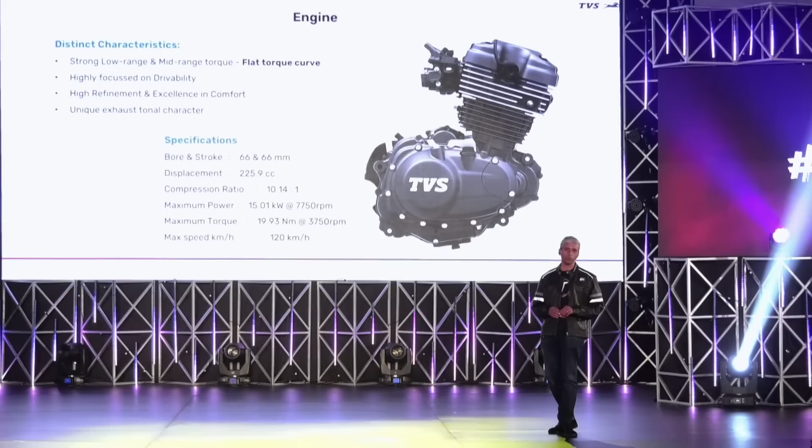The engine is a 66 by 66 square engine, 225.9cc. Power, torque - but what matters is the distinctness, the distinct characteristics: a very strong low and mid-range torque, a unique flat torque curve as flat as it can get, and highly focused engineering that has gone into looking at the drivability.

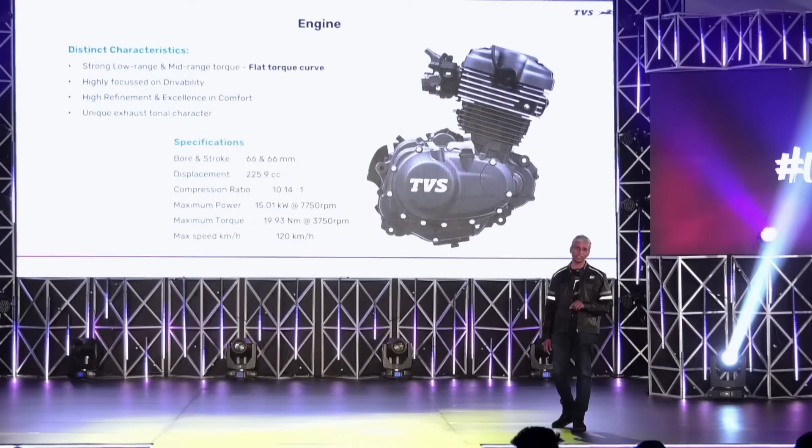We have driven every mile, every kilometer of the initial stages, looking for the distinct characteristics. That has been the theme of the engineering. And it's also highly refined, with excellence in comfort.

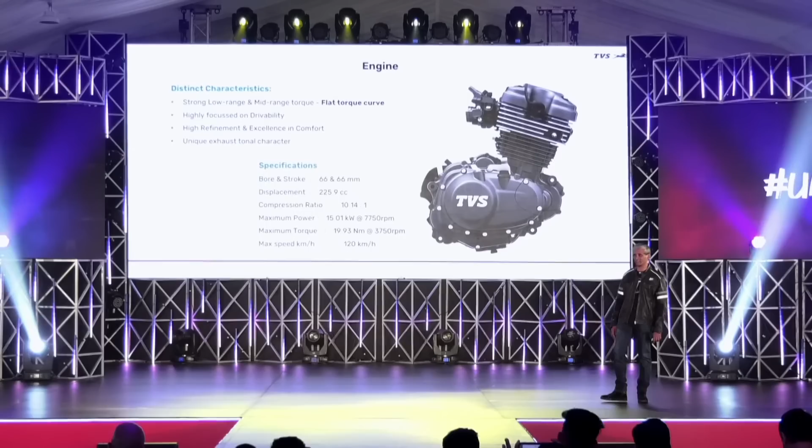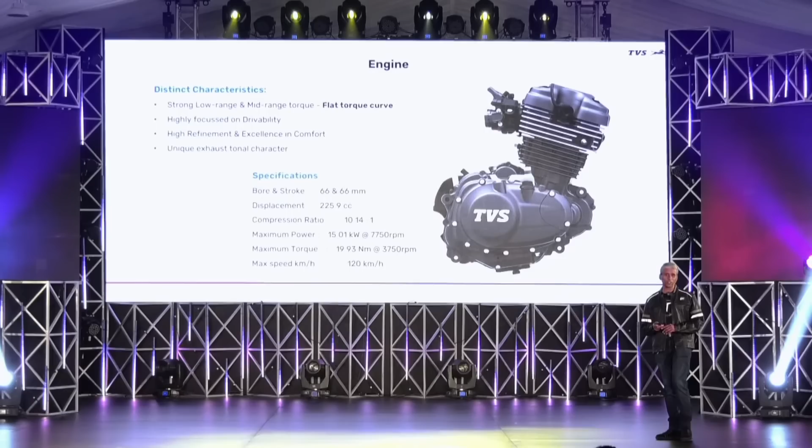On the engine, there's a lot you can do to make the ride more enjoyable - not only delivering the power and torque, but also the character of the engine. It can offer a lot of comfort when you want to go for a long ride, and to top it up, the unique tonal character from the exhaust adds to the characteristic Ronin engine. Let's look at some of the details.

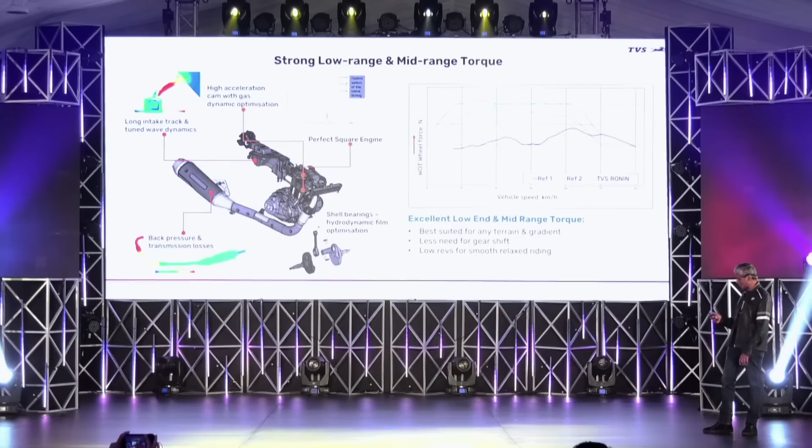The curve you can see here offers so much low and mid-range torque that keeps you going, and that comes out of detailed engineering of a lot of bits. What you can see here is 3-4 pieces out of that.

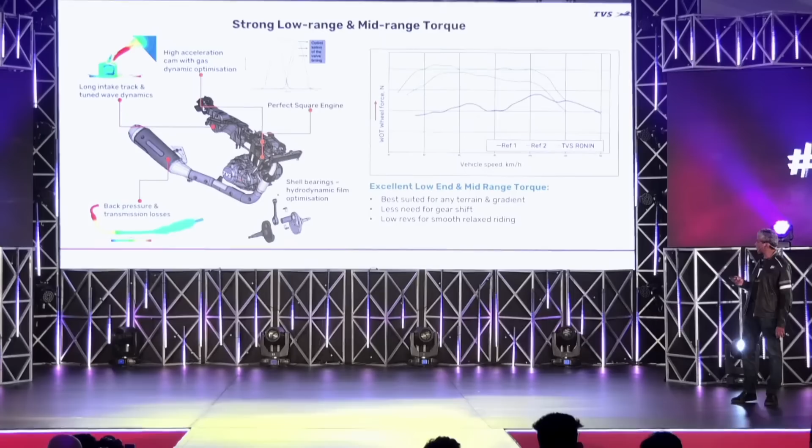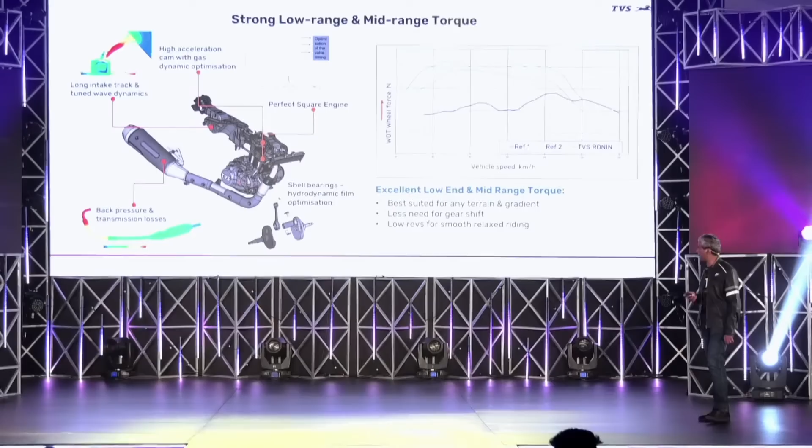The wave dynamics on the intake track, typically a long track can give us high torque, but the dynamics matters a lot. The dynamics matching with the intake and exhaust, supported by a high acceleration cam, adds up to the dynamic optimization of the fuel flow, the airflow, and the combustion that happens inside.

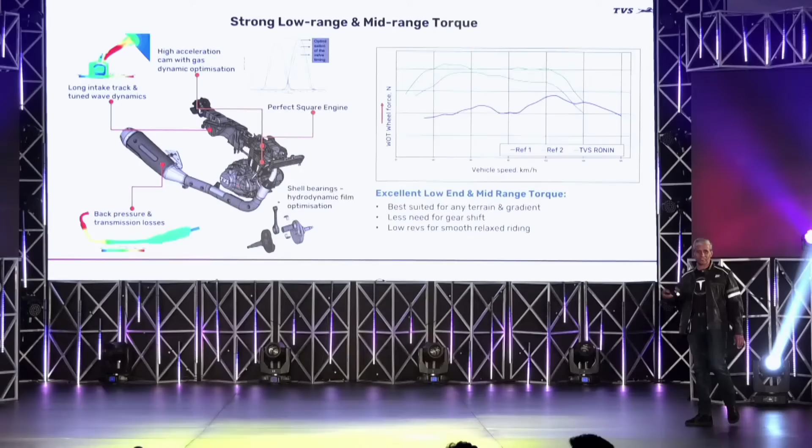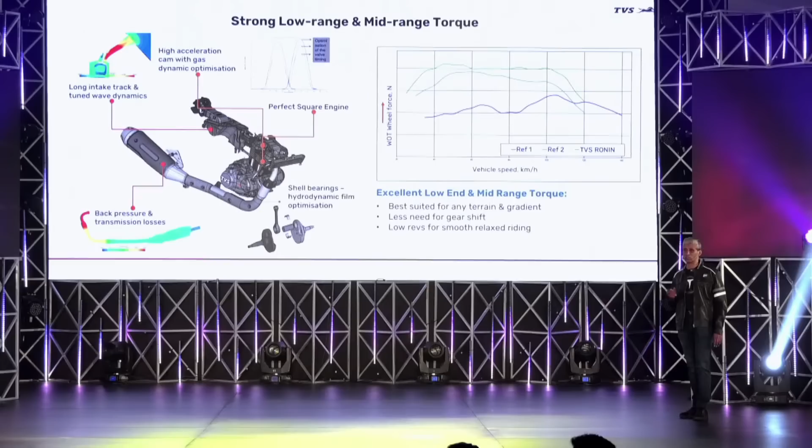To get all of that throughout the wide range, particularly in the lower end, shell bearings are used with hydrodynamic film for lubrication, which makes the crankshaft drive so free, so ready at low speeds to deliver friction-free torque output. That's what matters to the rider.

It's best suited for any terrain, also on the gradients. Let's take a look at the gradients a little later. There will be less need to gear shift, so we keep going, and low revs add up to a smooth and pleasurous ride.

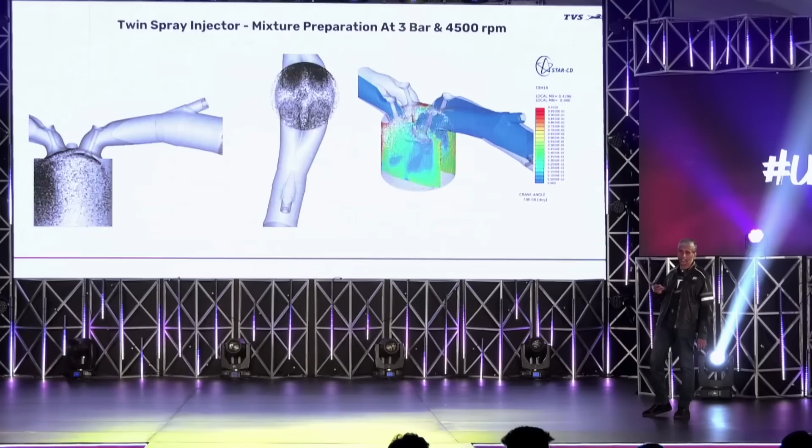One of the fine details in getting the combustion right is how you target the fuel spray. The fuel injection is something that will look the same on the outside, but the details matter a lot. The twin valve intake, the way the port design is done, a lot of simulation is done to get the characteristic fuel flow inside, the way the atomization happens, and the swirl and tumble, the way they complement each other, is all done to get that unique characteristic torque and power delivery, and making the combustion very smooth. The result, it's unscripted.

There is no reason to compare or talk of scoring anything or winning a race. But then as a biker, I would like to know what I get from the Ronin. So we just looked at certain typical day-to-day demands when I am on a bike, be it a 0 to 60, be it a pass-by acceleration on a highway, I need to slow down and again pick it up in the 4th gear, in the 5th gear, be it 30 to 80 kph or 50 to 80 kph.

It just goes effortlessly, goes ahead. With the opening of the throttle, it just instantly responds.

Another important parameter which all of us as bikers know is when I get into traffic, I would like to be a bit lazy, I would like to shift gears less, I would like the bike to keep going. So one of the engineering targets is to get the 3rd gear, 4th gear, 5th gear speeds as low as possible so that there is less need for shifting, and with the throttle opened, it just responds and goes.

And biking is all about going on the weekends, going for long rides, and also on the mountains. So gradability on higher gear is also an additional target we took. We wanted to make sure that in 3rd gear, the Ronin will climb the fastest on a 10-degree gradient, not just a small gradient. These unique characteristics are also added with a unique signature, the Ronin sound character.

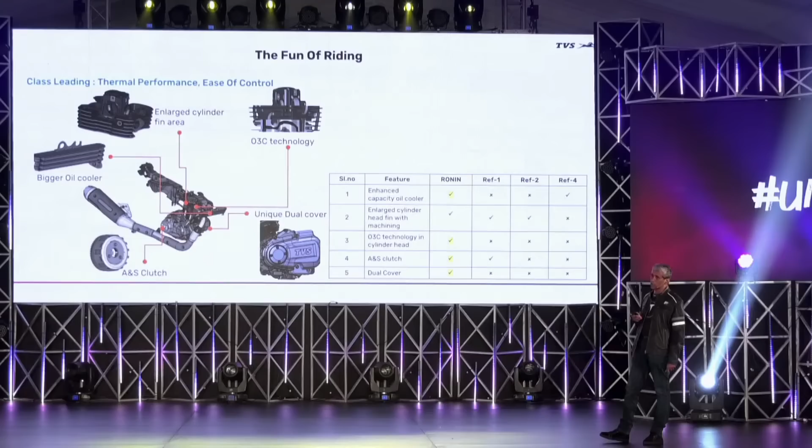The oil cooler is enhanced, O3C technology is put in, and the cover is a unique design that has gone into 2 layers that helps both for the thermal comfort and also for the sound characteristics that Ronin comes with. And the assist and slipper clutch adds to the joy of controlling as and when I need, whether it's a partial slip, whether it's a shift down, shift up, all of that.

So here again, a comparison to say things that are done new and different to get that unscripted characteristics. This engine has gone onto a vehicle that's also having unique design details, engineering, that makes it stand out of the crowd.

The theme has been a pleasure ride. A pleasure ride is one where I don't race with anyone. I'm not here to win a race. I'm not here to check my lap timing. I'm not going to be scoring any points, but I just want to ride. Ride wherever I want to, go wherever I want to. It's my ride, it's unscripted.

So what it means is planted, but also precise handling. Planted need not mean that I'm lazy, I don't respond. Control at ease - as I cruise through traffic, as I cruise through highways, any control that I would love, it is at ease. Comfortable upright posture for long rides, and a great ride comfort in all terrains. That's been the theme with which the whole vehicle engineering has been done.

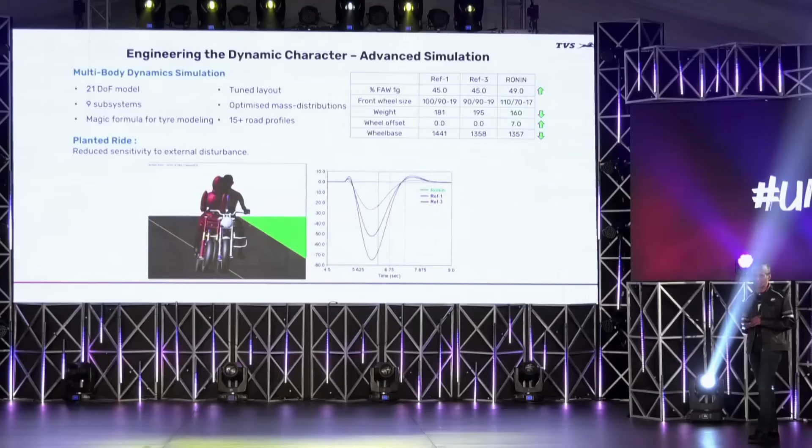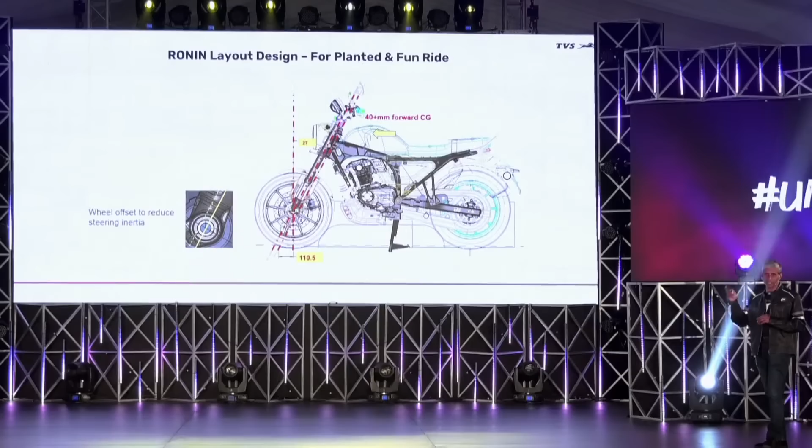It's an all-new chassis. It's a synchro-stiff technology engineered double cradle split chassis, with the mass balancing done with 40 millimeters center of gravity moving forward, and the wheel offset was something that was leveraged to dial in the right amount of trail without having to get my steering offset more.

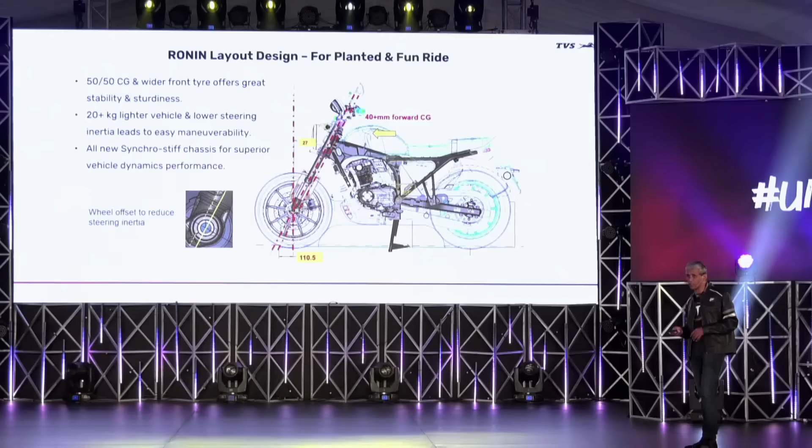What happens typically is for a given caster of 27 degrees, if I have to control the trail, I have to move the wheel forward, and when I do that, it moves away from the center of pivot. So the inertia increases, the response comes down. To tweak that, we have used this wheel offset to get that unique characteristics.

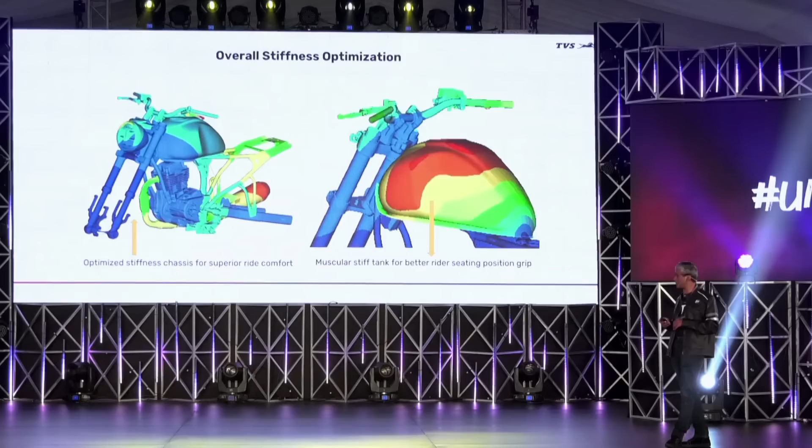The structure is generally expected to be stiff, but the stiffness is also not just static, it's also dynamic. In different frequency ranges, the structure responds very differently. So it was important for us to explore the operating frequency range and optimize the overall stiffness of the system, along with the chassis and swing arm design, that makes the complete bike get that unique dynamic characteristics and also a very high level of refinement.

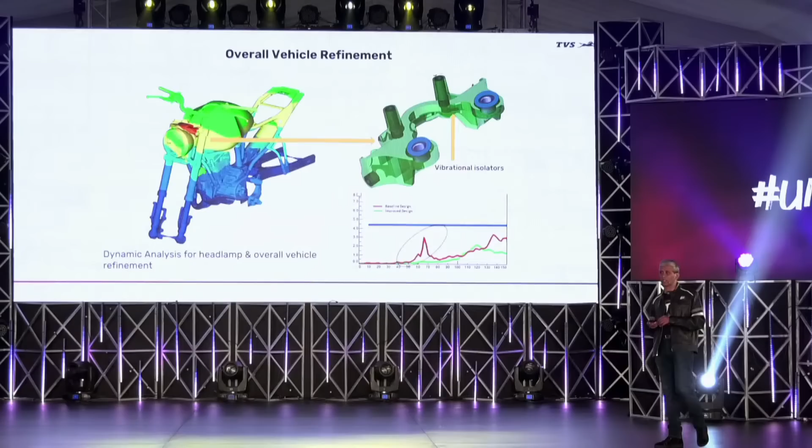Where required, we were to explore some of the unexplored ways of damping, altering the transfer functions of vibration to come from the engine to the vehicle to the tactile points, to dial in a character that connects with me, that talks to me all in all.

The result is depicted here in the form of two graphs. What you see on the left side is how much the bike responds when there is an external disturbance. The disturbance could be a gust of wind, a heavy vehicle passing by, a pothole, or a sudden unexpected road pattern. But Ronin doesn't care, it doesn't get shaken up.

The green line shows that the Ronin gets disturbed the least compared to the other bikes on the road. What you see on the right side is, if something is too planted, it's difficult for me to move, I need to put a lot of effort, but a motorcycle is not for that. It should listen to me when I want, and it shouldn't do anything on its own. So that required us to explore a new design space.

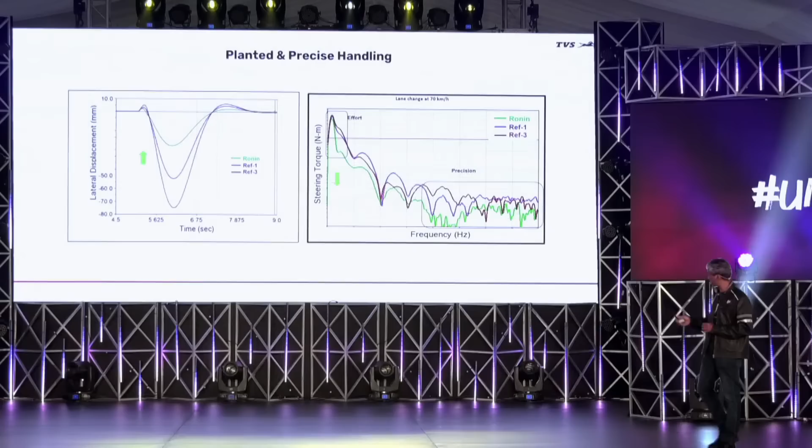Here what you see is a frequency range, the frequency at which I control. When I do a planned maneuver, it's a low frequency control, I've already planned, I've thought, I do it. When I have to do an unplanned maneuver, or if it's a mountain road with a lot of winding, I need to do quick maneuvers. So on the horizontal axis you see whether it's a planned slow maneuver or a high frequency control maneuver. All through the range, the control effort is minimized and the response is quick.

So the engineered plantedness adds that effortless riding, which is unique, to go for long rides and enjoy both the precision of response and the planted feel.

It's very important that the suspension is also tuned, not just for comfort but also for the dynamic characteristics. So TVS Ronin gets an upside-down showa front fork with big piston technology. The big piston offers something unique, instantaneous response, and the damping is so precise. Whatever speed we ride, whatever kind of road disturbance, the response has to be very precise to get that accurate damping control.

So big piston does that. The rear is a monoshock with a gas-filled chamber, which adds to the instant response from the rear as well. So tweaking the damping and its instantaneous response is a choice we made to get that overall dynamic character without compromising on comfort. Wherever there's a road disturbance, it readily absorbs the shocks and makes the ride comfortable, while also giving you precise steering response.

Tire is very critical, as we all know, and we had to design a new tire. The Remora compound was further improved to get what we wanted in Ronin, and an all-new tread pattern, a button pattern, was designed, looking at each tread block's movement so precisely and matching it with the rest of the vehicle's character.

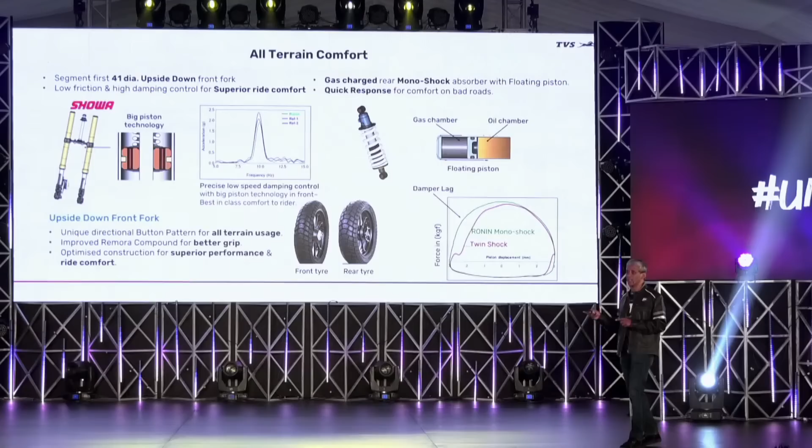The ergonomics has been designed applying scientific principles to look at how the human body reacts. We know about creep, I can hold 10 kg, but I can't hold 1 kg for an hour. So creep plays a big role when we ride long distances. It's not only about comfort, it's also about how active I can be, how much I can enjoy the ride. So it's an upright posture designed with scientific principles of our biology to release the back and give us an active, upright posture.

I keep riding and all I need is brake for that, though I don't use it, I need it when I want. So in braking again, we wanted to get something unscripted. As we keep applying the brake, you can look at one number where the force gets multiplied, but actual detailed study reveals that it is dynamic. It keeps changing as we keep pressing the pedal. In a disc brake, of course, you don't get too much of pedal travel, but even within that, there is a dynamic ratio change. So we worked on tweaking this.

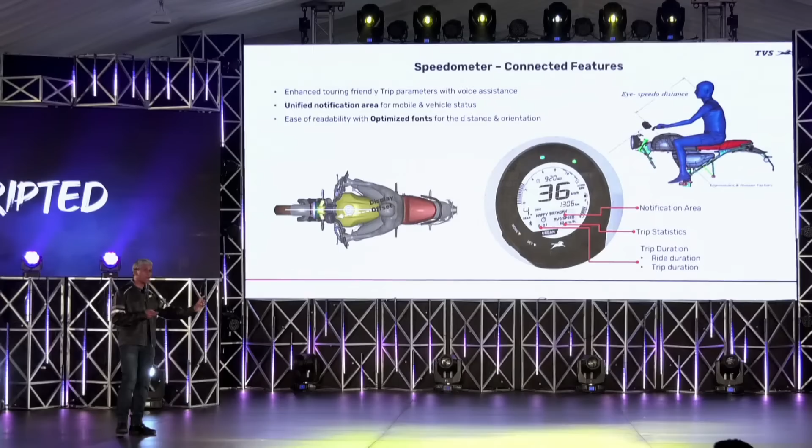The smart connected features, Vimal was touching on that. Of course, you get to explore a lot more tomorrow as you ride. So you manage so many things always in life. It's not one at a time. But when it comes to riding, most of us prefer riding, nothing else. But the world doesn't spare us like that. So I do get calls, and I don't want to be doing this so bad. And so I stay connected. I stay connected as I want, and then the voice assist helps me to do that.

And when I'm off from the bike, the digital dashboard on my mobile through the Smart Connect app gets me to see so many things, even if I'm away from the bike. And on the bike, I manage all my calls, I get my messages and notifications. I can switch off the notifications when I want to ride peacefully, only for the purpose of riding. And the navigation is voice assisted, so turn by turn, I get the guidance.

So that makes TVS Ronin unscripted, and I look forward to hearing from you tomorrow as you ride what you find unscripted. Thank you.

Thank you so much. Please give it up for Mr. Babu. Okay, so we can't wait to show, unveil, reveal what we have been building all this time. Are you ready? Are you ready to see the new way of life? You have to give me some sort of applause. Come on. Come on, be my audience for a change.